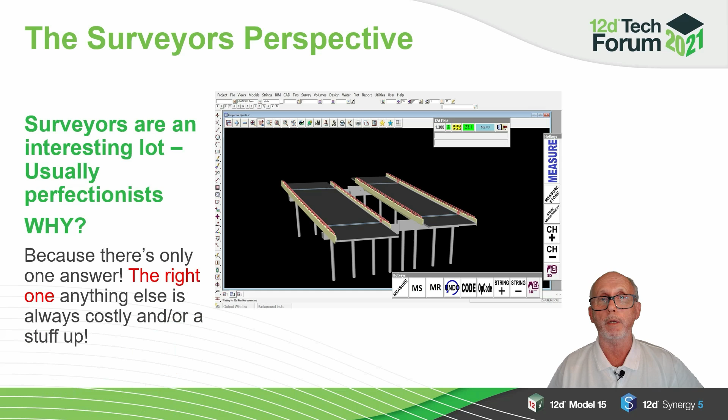So let's have a look why, from a surveyor's perspective. Surveyors are an interesting lot, usually perfectionists. Why? Because there's only one answer, the right one. Anything else is always costly and quite often a stuff up. So how does 12D Model survey and field assist the surveyors? It's one software package, not 3, 4, 5. It's cost effective, and time and training savings are enormous.

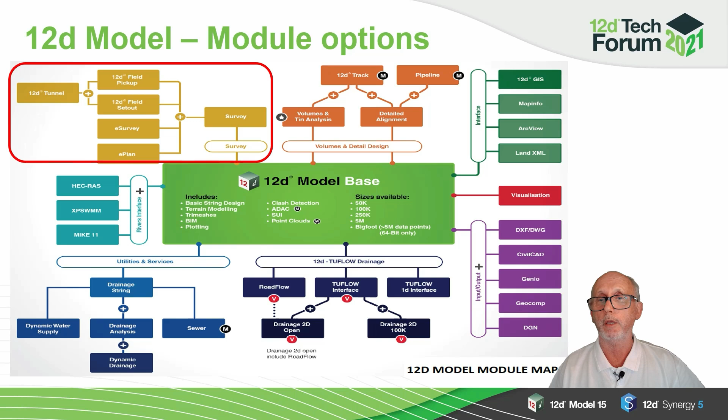Options to suit surveyors are usually met within 12D. This is the module map of all the options within 12D, and we're going to concentrate today on just the survey module and the 12D Field side of that as well.

So the survey module. You can upload and download to most common instrument brands, including Leica, Sokkia, Topcon and Trimble. Graphically reduce and edit your survey data, which is through the SDR. Corrections to that field data, typically miscoding or errors in shots, are done interactively on the screen. You can apply adjustments and transformations. Of particular note is the new GDA 2020. The adjustment types are Bowditch, compass, transit, and least squares.

You can create and label subdivisional estate lots, create and upload setout data, and create and upload machine control data. For the civil industry, this is a very important tool.

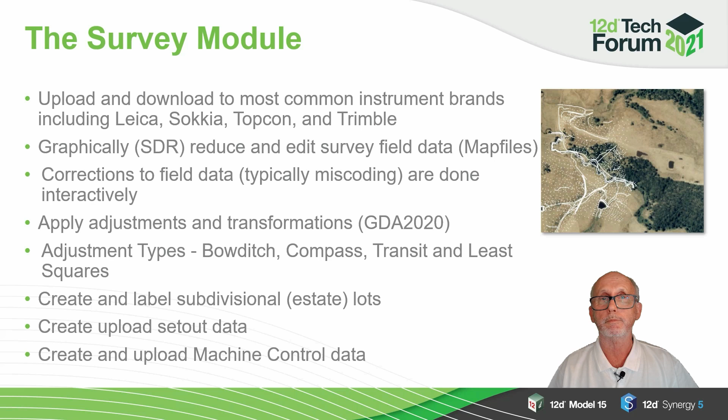So let's have a look at the survey data reduction. Here is a field file. I've chosen a point in here to highlight that it shows the link between the station where you are set up and the surveyed point, so you can quickly see where it was to find any issues. Also in here, I've changed the target height, and from a QA point of view, this has been inserted in blue so that it can be seen very easily that that's been a change.

And down here, I've actually deleted a survey shot, and it's been marked in red and is not used during the reduction. We also have over here on the right-hand side the map file that is being used to bring that data in. So summing up, it has very powerful editing tools. It's graphical, so you can actually see and easily manage it, and you've got the QA requirements built into the field file that you're reducing.

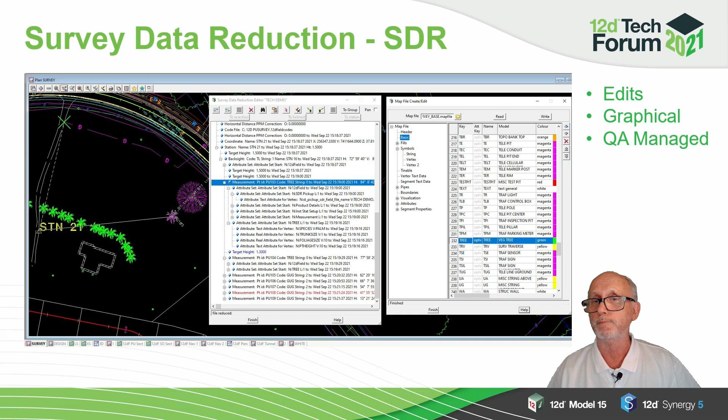Let's have a look at one of the adjustments. Least squares network: you can create, edit, weight it, adjust it and report on it. And this is our new least squares network adjustment panel here.

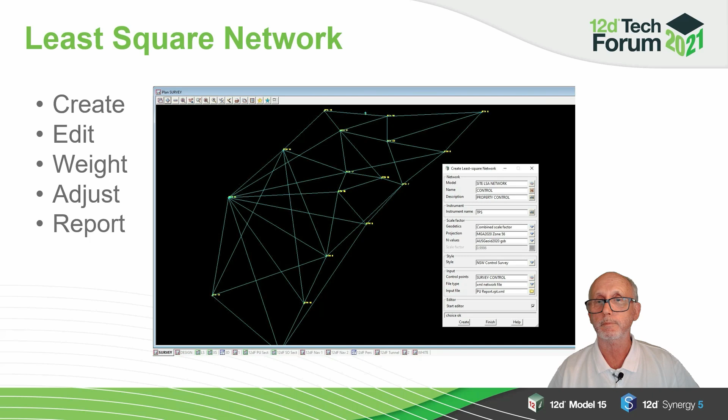12D Field. This is a very powerful tool running on Windows tablets. It's been developed for both GNSS and total station use. And the very important thing about 12D Field is it's the same software in the office and in the field, particularly for both setout and pickup. So you have much faster project and data management, and you see it live within the field. You're live in your position and you're live in your information.

This has come about by the survey use of tablets or tablet PCs. Surveyors are also now quite commonly digital managers, because in construction, time saved is money saved. The industry has become very reliant on surveyors. Over the years, the use of paper information for plans and so forth has gone out the window.

So surveyors now improve time management through in-field information, files, machine guidance files, reporting, QA reports, pavement reports, and maintaining site workflows through all these activities. So the development of the tablet PC has really improved the surveyor's ability to maintain site continuity and information requirements. And here is a typical tablet. This is the Panasonic.

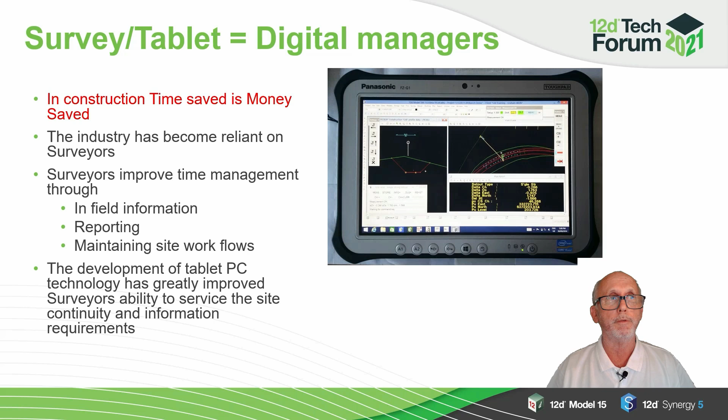So let's have a look at the 12D Field setout. This is a typical tablet view that you can set up with 12D Field. You've got large measurement buttons and activity buttons on the left-hand side of the screen. You've also got, in this case, 2 panels running at the same time, so you can get the information for 2 types of setups. In this case, it's a single string setout and a surface setout. You can see in the sectional view where you've taken the shot, and you have a full navigation panel as well. So it's a very powerful tool using the tablets.

Some of the options within 12D Field setout and pickup: you can have the station details, the station standard, Helmert resection, station least squares. You can do a height calibration by adding more stations into a setup, and you can upload to some instruments.

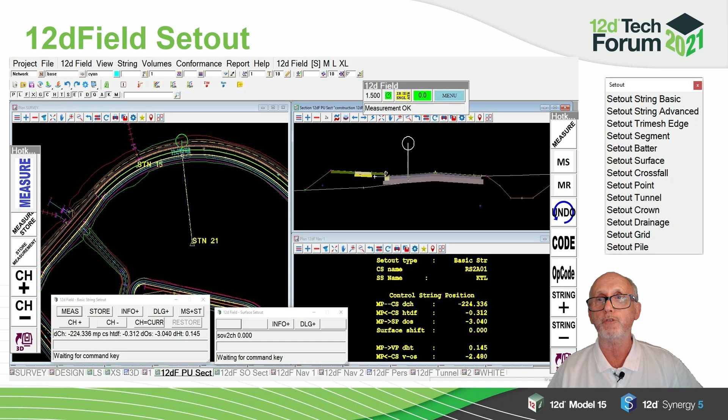Set out segments, batters, surfaces, crossfalls or between 2 strings. Points, tunnels as well if you have the tunnel option in 12D Field. Crowned roads, so crowned centre lines, drainage, grids for buildings, and pile setouts as well.

The other half of 12D Field is pickup and the SDR pickup. The menu for this is quite comprehensive as well. You've got the SDR pickup, which is being shown in this slide image on the screen here of a tablet. And you've got your measurement options, you've got your ability to do codes, your strings, and we've introduced into version 15 the button within the grid to actually just choose a code, press the grid button in the MR row, and it would swap to NS and so forth.

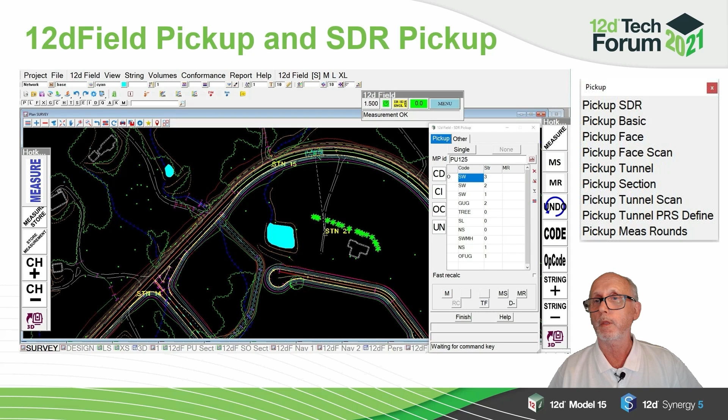We also have the basic pickup, face pickup. We can scan if you're using a compatible scanner, tunnel pickups, sections, tunnel scans, and last but not least, measurement rounds. Very powerful pickup options within 12D Field.

One of the most exciting and very, very handy options to come into 12D Field has been the combination of the Setout and the SDR pickup. We can actually do a pickup and set out or conform a road as we're going. And the attributes for both these, for the Setout panel and the SDR pickup panel, are stored on every point. And there's more information on that within Ben Murphy's and my presentations within the survey room of this technical forum.

So the attributes, just summing up on this, the attributes for Setout and pickup, for as-built and detail, and all the data is stored within the survey and within the field file and on each point.

So let's have a look now at the pavement conformance. Greg Newman from EXDS will be doing a detailed presentation on this, and it's a very handy tool that's been introduced to actually provide a link between the 12D Field attributes and the tolerances to the pavement. So you can pick the point within the model of the survey that you want to do a pavement conformance to, and it copies the attributes such as the string, pickup details, and the tolerance settings, which I'll bring up now. The tolerance settings here are copied over into that pavement conformance panel.

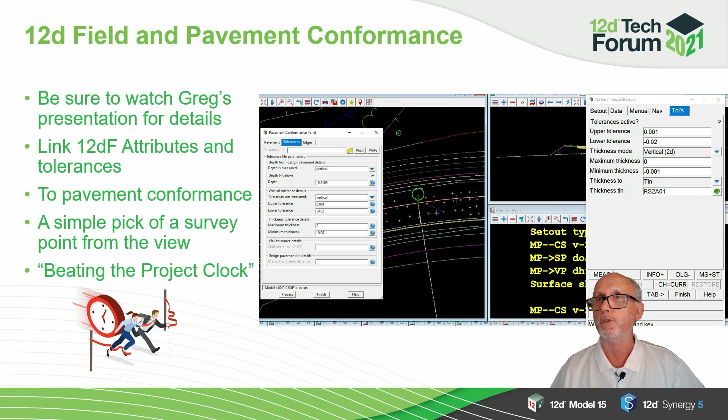A simple pick of the survey point from the view. It's a very, very nice feature. And this is one that actually beats the project clock because it greatly improves the speed of the surveyor.

So, point cloud management. You can import multiple formats, utilise point cloud options, terrain model using tins and tri-meshes, and this one package of 12D will manage large data sets for either, in this case here, a LiDAR pickup, and we also have an example here of a TBM tunnel scan for an as-built. Very, very powerful point cloud management tools.

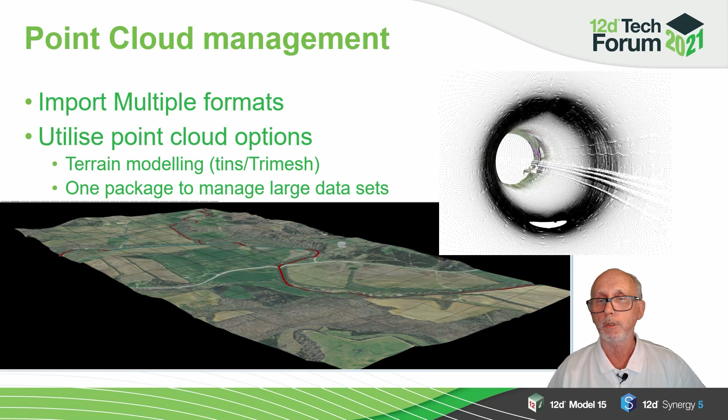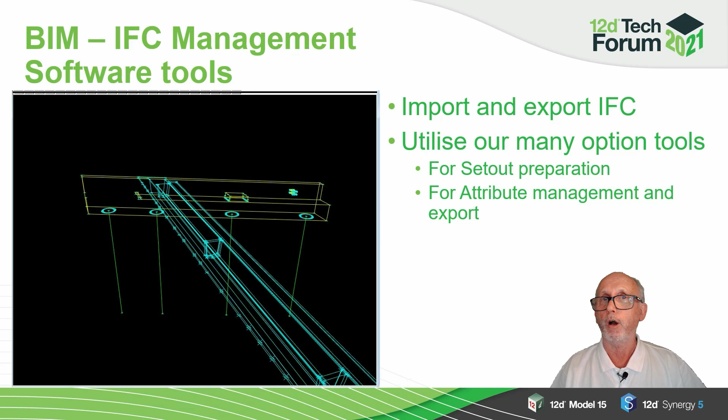BIM management and IFC tools for 12D include import and export of IFCs. So there's an example there of an IFC input. And the options to actually prepare for Setout, as we can see from this slide going through, to create the strings, because surveyors require points and strings to actually set out. And this has got some very, very powerful tools. And I've got a presentation within the survey room on the IFC preparation for Setout.

So it's a little bit about the survey, but survey would not be fully described within the suite of 12D solutions options without mentioning 12D Synergy. 12D Synergy use for surveyors is rock solid for QA. You can check in, check out, you can manage the history, you can roll back, you can access projects saved in 12D Synergy directly within 12D Model.

You can centralise customisations to make sure everything is always up to date. There's enhanced sharing management, which you don't even have to do from within 12D. You can define permissions so that not everybody has access to the data, or everybody that you want to have access has it. Intelligent data transfer. And there's the offline mode, particularly for surveyors.

During the creation, setting out and use of survey, particularly on construction sites, models are created and projects within 12D are created, and they get larger and larger as time goes on, and they are updated and changed. So you have all your milestone backups to actually allow you to roll back to those if you want. And that can actually save up to, in this case here as an example, 84% data storage reduction.